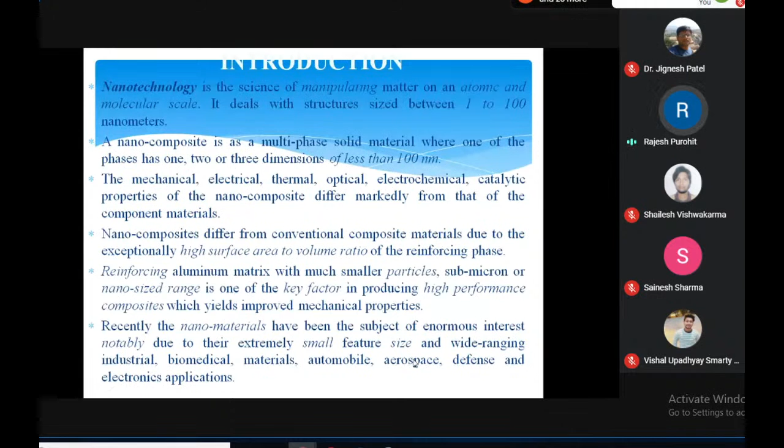Reinforcing the aluminum matrix with much smaller particles, submicron or nano size range, is one of the key factors in producing high performance composites which yield improved mechanical properties. Recently, nanomaterials have been the subject of enormous interest, notably due to their extremely small feature size and wide range of industrial, biomedical, material, automobile, aerospace, defense, and electronic applications.

The nanoparticle reinforcement enhances optical properties, dielectric properties, heat resistance, or mechanical properties such as strength and resistance to wear and damage. Basically what happens is, as we go on reducing the size up to nano level, the crystal defects go on decreasing and reach almost to nil. So as the crystal defects are reduced to nil, the strength we get in the material is equal to the bond strength of the material because there are no crystal defects. That's why at nano size or smaller size we get very high mechanical properties. That is the main reason for materials or nanoparticles or nanofibers.

So that is the reason - as we go on reducing the size to nano level, the strength goes on increasing for the particle or fiber. The aluminum alloy provides a good matrix for the development of nano-composite because of low density, high corrosion resistance, ease of fabrication, and good thermal conductivity.

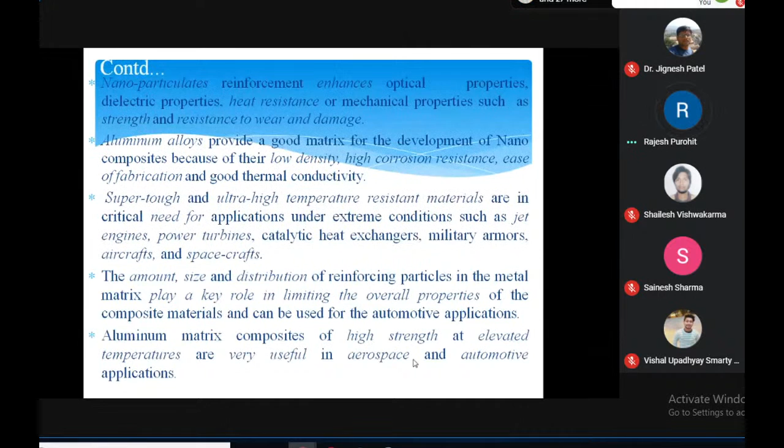Super tough and ultra high temperature resistant materials are in critical need for applications under extreme conditions such as jet engines, power turbines, catalytic heat exchangers, military armors, aircraft, and spacecraft. The amount, size, and distribution of the reinforcing particles in the metal matrix play a key role in limiting the overall properties of the composite material, and can be used for automotive applications. Aluminum matrix composites of high strength at elevated temperatures are very useful in aerospace and automobile applications.

Now, what is basically a composite material? In a composite, there is a matrix material which is the continuous phase, reinforced with particle reinforcement, and then we get the composite material. So the matrix is the continuous phase and particles are the discontinuous phase. As a reinforcement, it is mostly used to increase the strength, that's why it is called reinforcement. This type of composite is basically a particulate composite.

The other type has the matrix reinforced with fiber, that is long fibers. So this is called fiber reinforced composites.

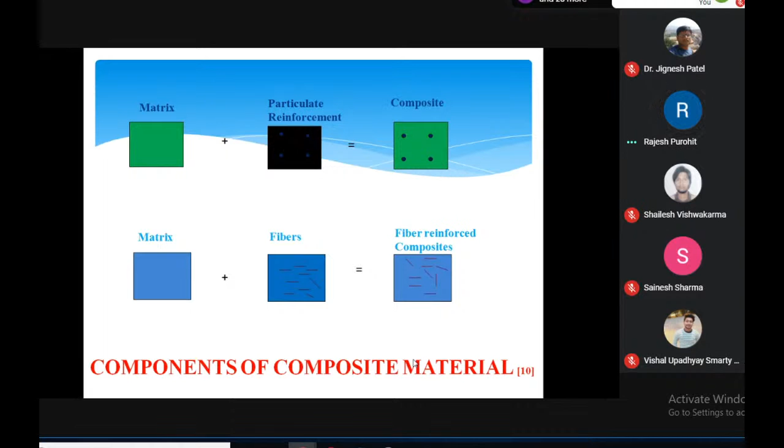In terms of composite material types, on the basis of matrix we can categorize into three types of composite material. If metal is the matrix, it is called metal matrix composite. If ceramic is the matrix material, then it is called ceramic matrix composite (CMC). And if polymer is used as the matrix, then it is called polymer matrix composite.

Similarly, we can also classify on the basis of reinforcement. If particles are used as reinforcement, then it is a particle reinforced composite. If fiber is used as reinforcement, then it is a fibrous composite. And if it is a full sheet of fiber or lamella, then it is called a sheet or laminar composite.

In metal matrix composites, predominantly a metallic bond is present, with a crystalline structure and good conductivity, and they are quite ductile and chemically unstable.

In ceramic matrix composites, the properties are generally predominantly crystalline or amorphous structure, or it may also be semi-crystalline, with poor conductivity. Ceramics are poor conductors, non-ductile, very hard and brittle, and chemically stable.

Polymer matrix composites (PMCs) are basically predominantly homopolar and dipolar bonds, amorphous structure, and poor conductivity, so they are used as insulators basically. They have high temperature ductility and are chemically stable.

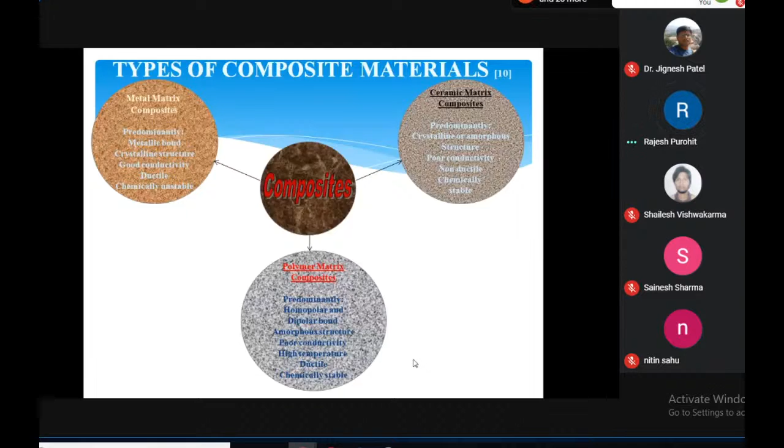For key characteristics, we are using aluminum oxide, also called alumina, as the reinforcement, and aluminum is the matrix material. So what are the basic properties of aluminum and alumina due to which they are widely used?

Aluminum is basically lightweight, its density is 1/3 that of steel. It has high resilience and corrosion resistance. As we know, an aluminum oxide film is formed on the surface, which has very high corrosion resistance and prevents further oxidation. That's why aluminum has good corrosion resistance and good forming and fabrication characteristics — it can be easily formed, and various forming operations can be done on aluminum easily.

And high crashworthiness — crashworthiness means they usually perform better in a crash. If the automobile is crashed, the damage will be lesser. So that is basically crashworthiness. It also has good low temperature properties, recyclability, thermal and electrical conductivity, and reflectivity. These are the good properties of aluminum, and because of that, aluminum is widely used in composite materials.

Then there's aluminum oxide, also called alumina. It also has very good properties like chemical and thermal stability, high melting temperature of about 2050 degrees centigrade, high hardness, relatively good strength, high hot hardness (hardness at high temperature), high dielectric constant, and high bulk modulus and dielectric strength. Because of these good properties, if we reinforce this alumina in molten aluminum, we get better mechanical and various physical properties.

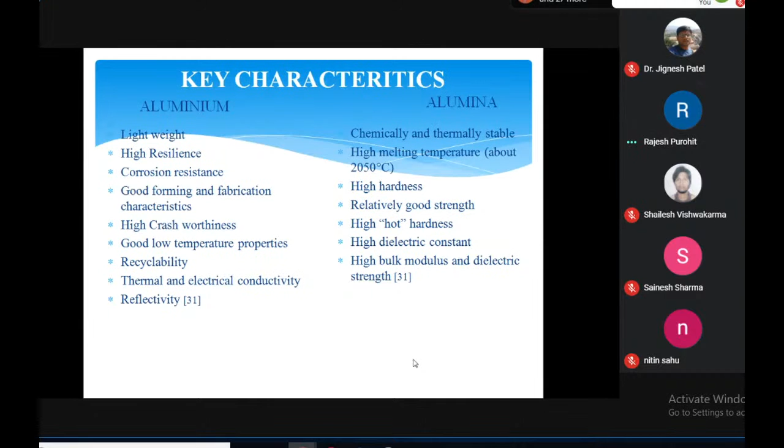Now, aluminum oxide nano-composites, due to their lightweight and high specific strength, particulate reinforced aluminum nano-composites, are attractive structural materials for various domains such as automobile, aerospace, defense, sports, recreation, and other applications.

Owing to the low density, low melting point, high specific strength, and thermal conductivity of aluminum, a wide variety of reinforcement materials such as aluminum oxide, silicon carbide, B4C, aluminum nitride, silicon nitride, titanium carbide, TiO2, TiB2, and graphite have been reinforced into it. So these are the various types of reinforcement we can use.

But SiC and aluminum oxide are most commonly used because they have good properties. Compared with pure aluminum, 2 volume% nano alumina addition improves yield strength by about 66%, hardness by about 50%, and tensile strength by about 80%.

Heat treatment of the aluminum with aluminum oxide nano-composite, like solutionizing and aging, is beneficial to improve the micro-hardness, UTS, and yield strength. The porosity level is reduced with an increase in the volume percentage of alumina.

Wear rate is lower under a load of 20 Newtons, but increases remarkably after this value.

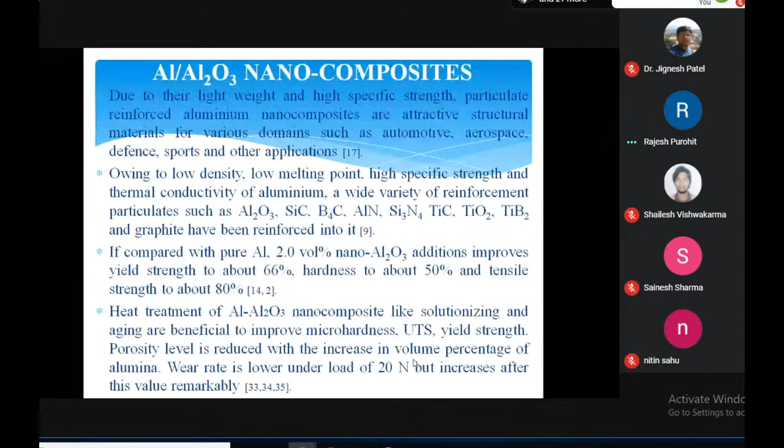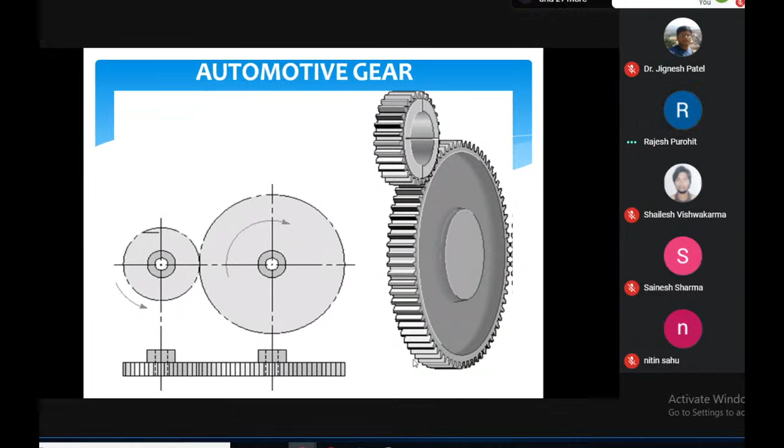We have also fabricated various auto parts such as gears, cams, connecting rods, crankshafts, and many more. This presentation will particularly focus on the gear for automobiles, specifically spur gears fabricated as an automobile component.

So what is a spur gear? Spur gear is the simplest type of gear manufactured and is generally used for rotary motion transmission between parallel shafts. It is the first choice for gears except where high speed, load, and ratio direct us toward other types of gears. Wherever speed is not very high, we prefer spur gears because they are the simplest and easiest to manufacture. Spur gears are characterized by teeth perpendicular to the face of the gear, are by far the most commonly available, and are generally the least expensive — they are very cheap.

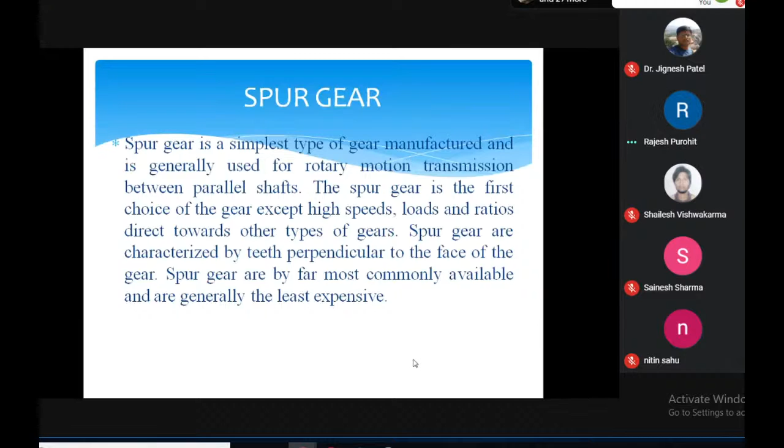Next I will discuss a little of the literature survey we have done, covering some of the papers.

Effect of weight percent of aluminum oxide on density and hardness of the nanocomposite — these are graphs from various literature. On the left, relative density is shown against weight percent of nano-sized aluminum oxide. We see density first increases and then decreases, with the highest relative density obtained at about 3 weight percent nano-alumina, after which it decreases.

This is basically due to more porosity forming when we mix more than 3 weight percent. Most properties are very good at about 2.5 to 3.5 weight percent alumina, and after that they go on decreasing. This is mainly because at higher weight percent, proper mixing does not take place. Also, in casting, after about 4 weight percent the melt rejects the particles since the volume of particles becomes too high — they don't mix properly and either settle at the bottom or float on the surface, and segregation takes place, causing properties to decrease after 3 or 4 weight percent of nanoparticles.

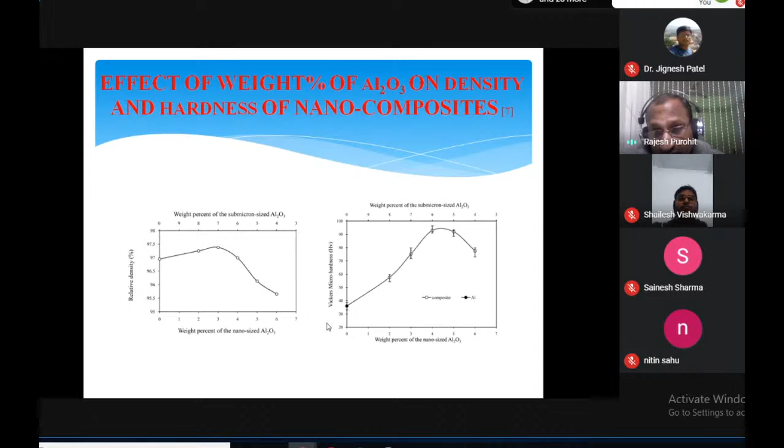The other graph shows Vickers micro-hardness values, where the best, highest value is obtained at about 4.5 weight percent, after which it decreases. So generally, properties first increase and then decrease, because at higher weight percent segregation takes place, particles don't mix properly, and bundles of particles form, which reduce the properties.

These micrographs show mechanical properties with weight percent of aluminum oxide — some show dimples, some show porosity — and the graph on the right shows strength variation with weight percent of nano aluminum oxide.

The bottom curve shows yield strength and the upper curve shows ultimate tensile strength. The dark triangle marks the value for pure aluminum, at about 80 megapascals. When reinforced with nano aluminum oxide, strength first increases, then at about 4 weight percent we get the highest yield strength and highest tensile strength, after which it decreases again. Tensile strength remains higher than yield strength throughout.

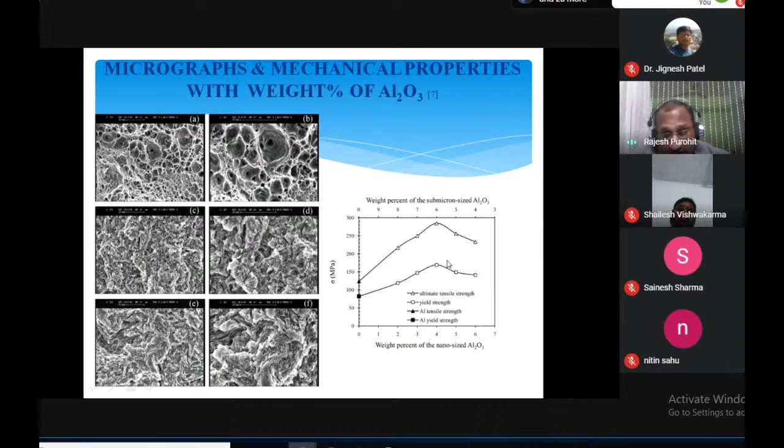These are the powder particle morphology, a micrograph of the powder while ball milling, because we can fabricate composite by ball milling also. Although our work is concentrated on the casting method, powder metallurgy can also fabricate the nanocomposite. We have to do ball milling first with aluminum and alumina particles, mechanical alloying basically, using the ball mill.

In a ball mill there is a cylindrical container and inside there are balls, and generally we fill up to about 10 to 15 percent material or powder material. We take aluminum in powder form and alumina also in powder form and run the ball mill for maybe 10, 15, or 20 hours.

In between we take the sample at an interval of 5 hours, and the morphology of the powder particles is seen from the SEM machine, scanning electron microscope. At intervals of 5 hours the micrographs are shown, similarly for aluminum with nano alumina particles. The figures show the change in powder particle morphology of aluminum powder and aluminum oxide particulate at magnification of 400.

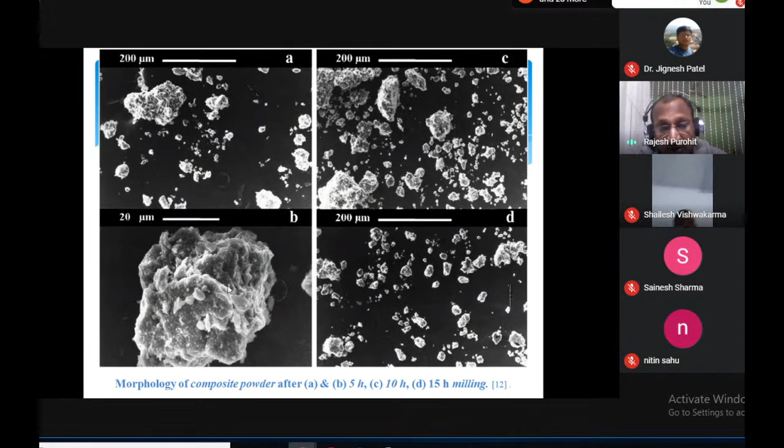So the fracturing and cold welding phenomena take place, and in the final stage, after 15 hours of mechanical alloying, a fine homogeneous composite structure is obtained due to fracturing of the composite lamella structure and their random welding orientation. Due to the inert gas atmosphere, the newly fractured surface was prevented from oxidation.

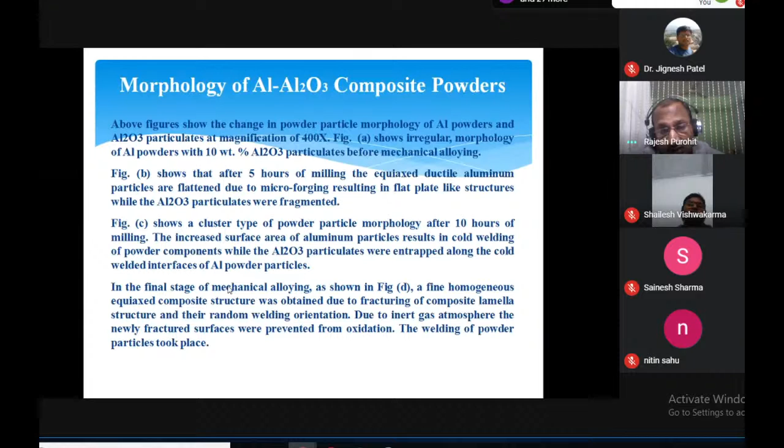Aluminum has a high tendency of oxidation, so an inert atmosphere of argon or nitrogen has to be supplied. The welding of the powder particles takes place, so cold welding takes place. Because of that, the aluminum and oxide particles get mixed together, and the alloy is formed basically by mechanical means.

Now this is showing variation. The first graph shows the variation of porosity with nano size aluminum oxide content. We see that with increasing volume percent of the aluminum oxide, the porosity level is continuously increasing. Basically, the particles become points of porosity, and near the particles more porosity is assembled, so at higher weight or volume percent, porosity level increases.

On the right side, SEM micrographs are shown. The upper figure shows lower magnification, and the bottom one shows the SEM micrograph at higher magnification. We see that the nanoparticles are quite visible in the bottom graph, showing that they are almost uniformly distributed.

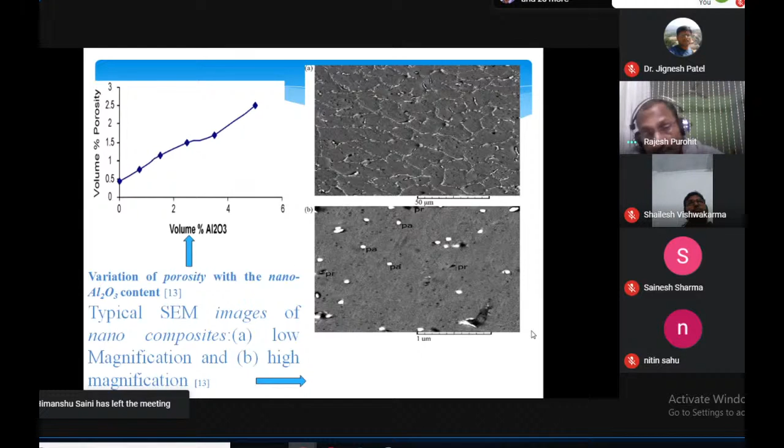This is showing the hardness values variation with the volume percent of nano alumina. Here also we see at about 2.5 volume percent we get the best hardness, and then it is decreasing.

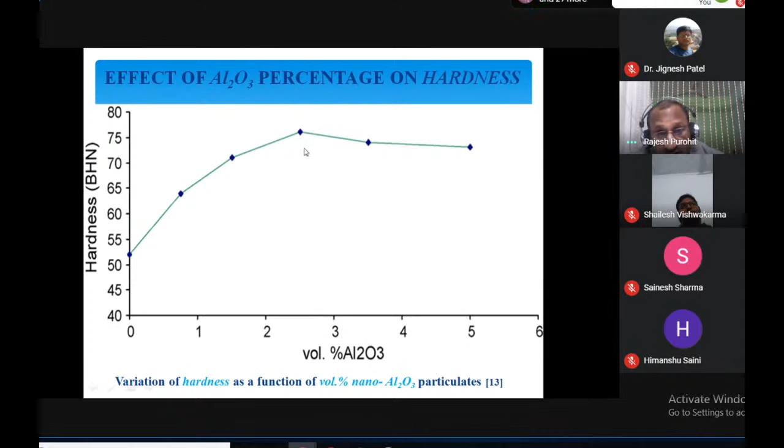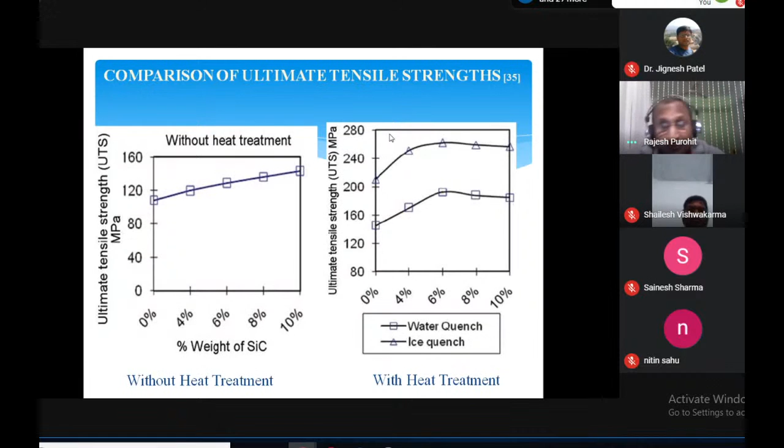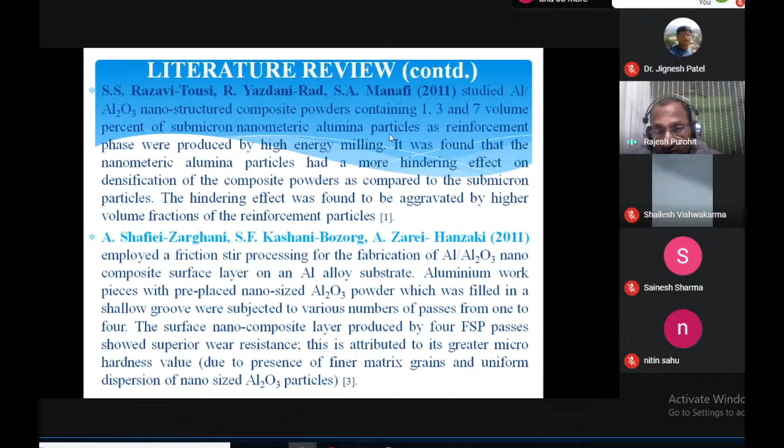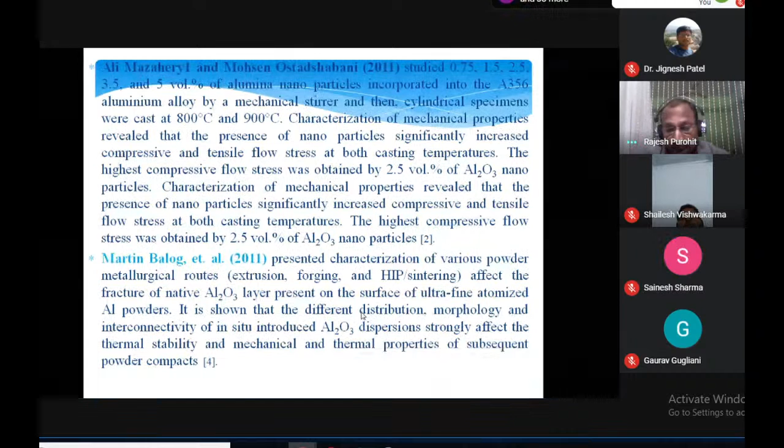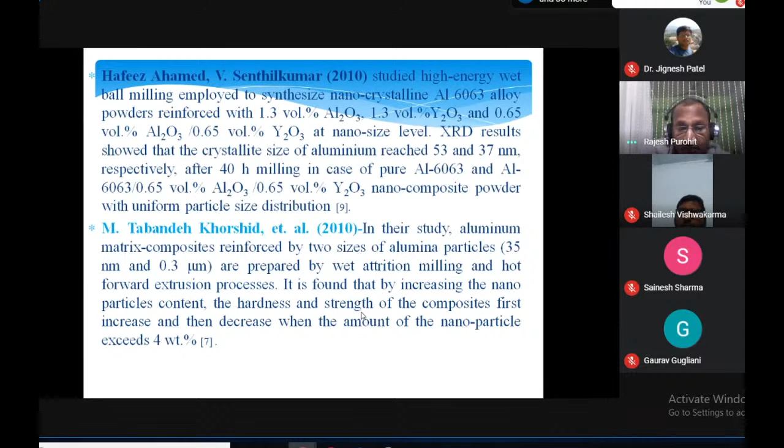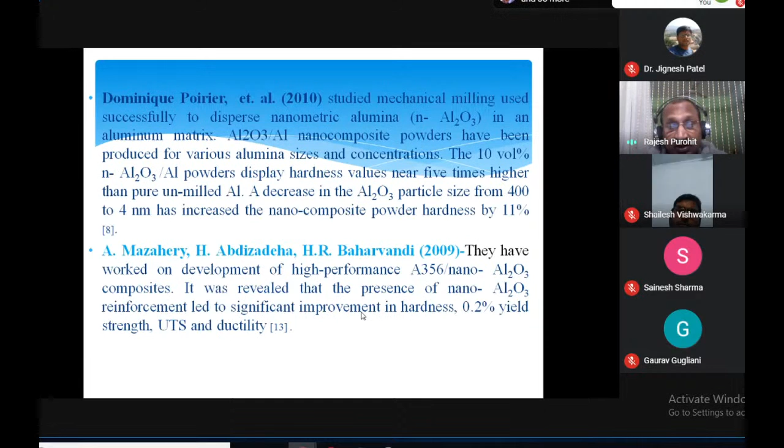Similarly, A. Mazahery et al. studied and worked on the development of high performance A356 nano alumina composite. It was revealed that the presence of nano alumina reinforcement led to significant improvement in hardness, 0.2% yield strength, UTS, and ductility. As we see from the literature studied, we got similar kind of results in our study also. So I will skip this literature now and come to our work.

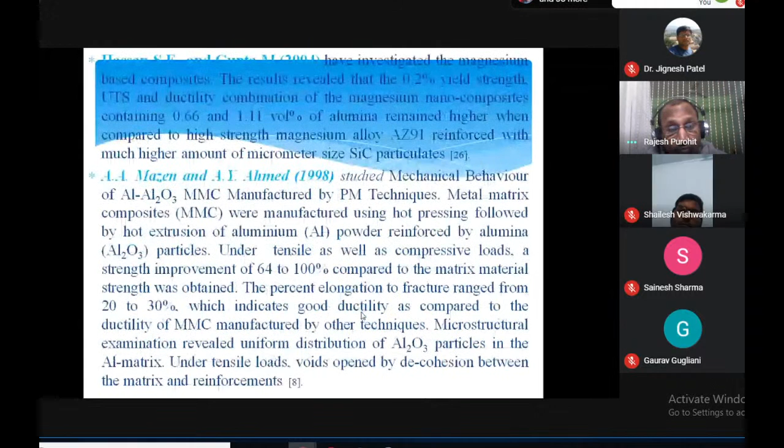Our research objective is doing ultrasonic analysis and preparation of the automotive component, that is the gear, using this nano composite based on the optimum composition. Then heat treatment of the nano aluminum composite automotive gear was also done, and the effect of heat treatment was studied.